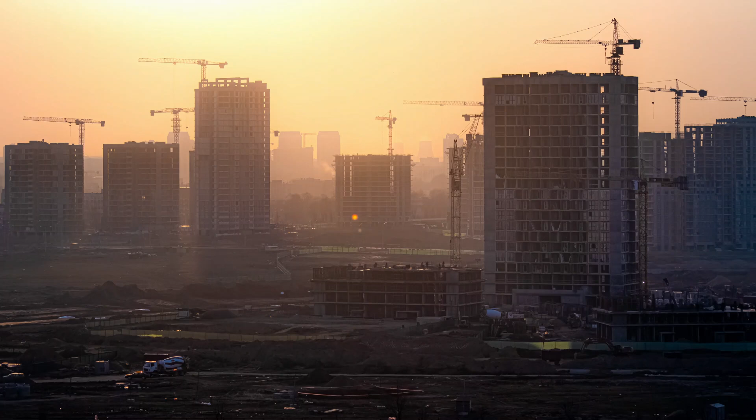Welcome to the future of construction. The revolutionary developments of 2025 are transforming the construction industry. We'll look at the newest construction technology in today's video, which you really need to be aware of. These developments, which range from sustainable solutions to artificial intelligence, are revolutionizing the sector.

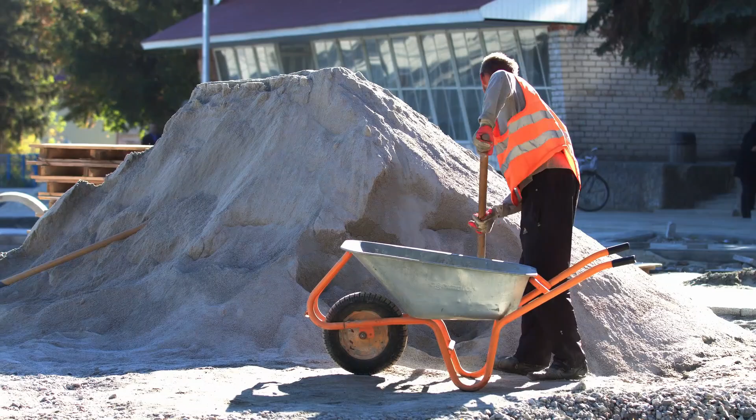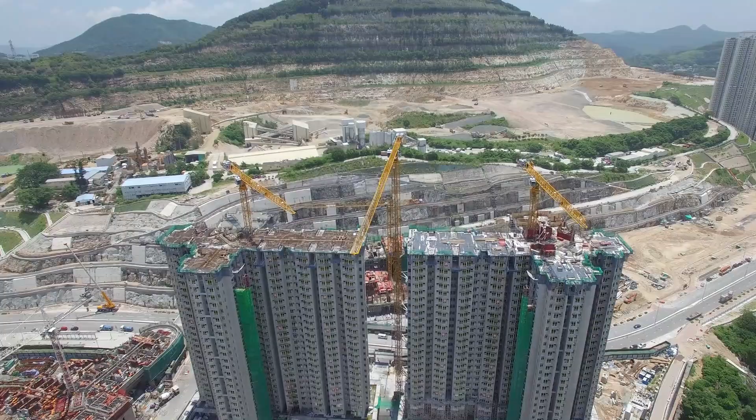Let's get started. 1. Autonomous construction vehicles. The way we transport materials around building sites is being completely transformed by our first technology. These days, autonomous construction vehicles are leading the way in the sector. Imagine self-driving bulldozers, cranes, and dump trucks. These vehicles are outfitted with AI and sensors that allow them to navigate and operate without human assistance.

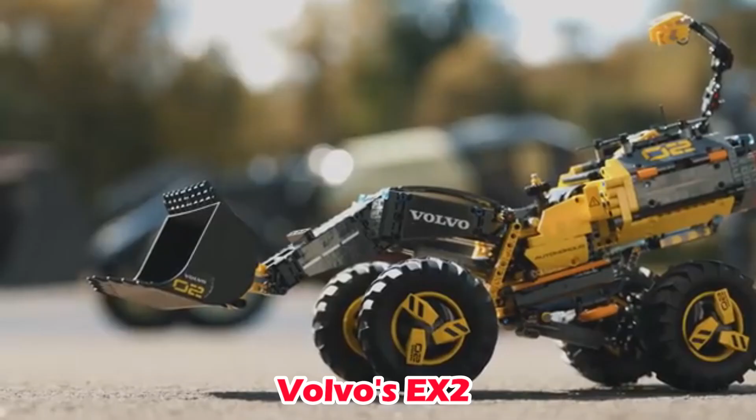These intelligent devices, which can operate effectively around the clock without human error or exhaustion, have already been produced by companies like Volvo and Caterpillar. Volvo's EX2 electric autonomous wheel loader can move large objects throughout the site without a driver, saving money and time.

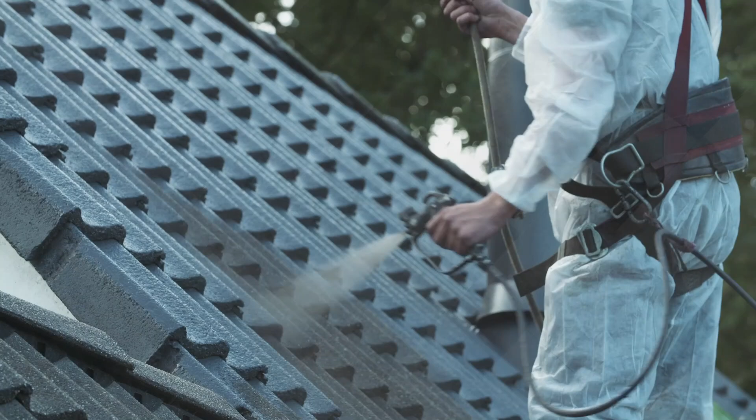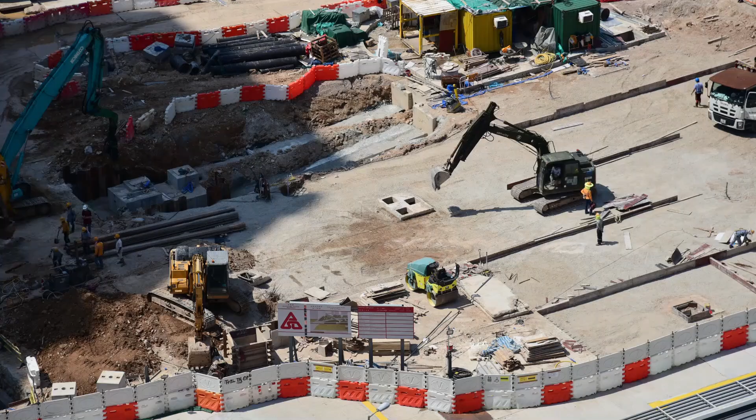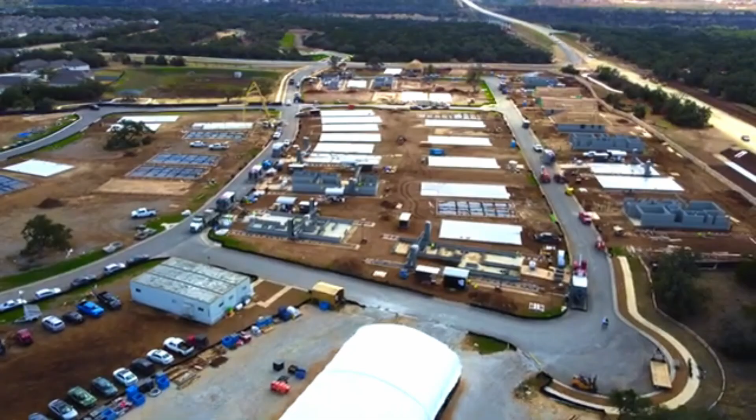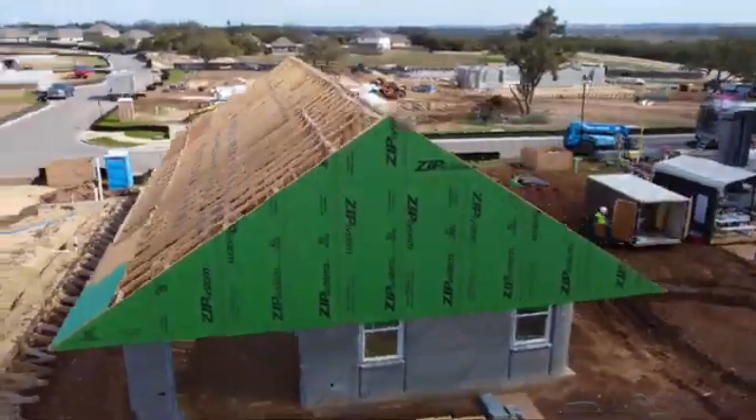2. 3D printing of buildings. Construction has been blown away by 3D printing technology. However, printing little models is not what we're talking about. We're printing whole structures in 2025. With large-scale printers that can produce entire skyscrapers, bridges, and even homes, 3D printing has entered the construction industry. Icon's Vulcan printer, which can print a 1,000 square foot house in a single day, is among the more impressive examples. It makes use of a unique, environmentally friendly, and incredibly durable concrete material. This technology promises to provide quick fixes for the housing shortfall, cut waste, and minimize building costs.

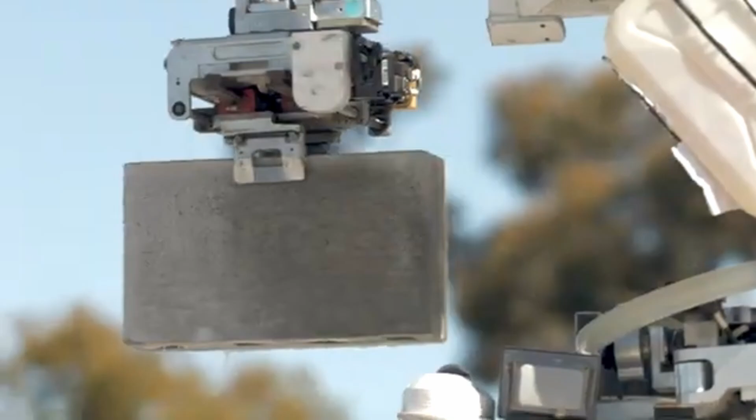3. Robotic construction workers. Speaking of robotics, a growing number of construction sites are using robotic labor. Robots such as FastBrick Robotics' Hadrian X can build bricks far more quickly and precisely than human laborers. By laying up to 1,000 bricks per hour, the Hadrian X reduces labor expenses and human error. Additionally, they are ideal for difficult construction projects like high-rise structures or disaster areas because they can operate in hazardous or difficult-to-reach areas.

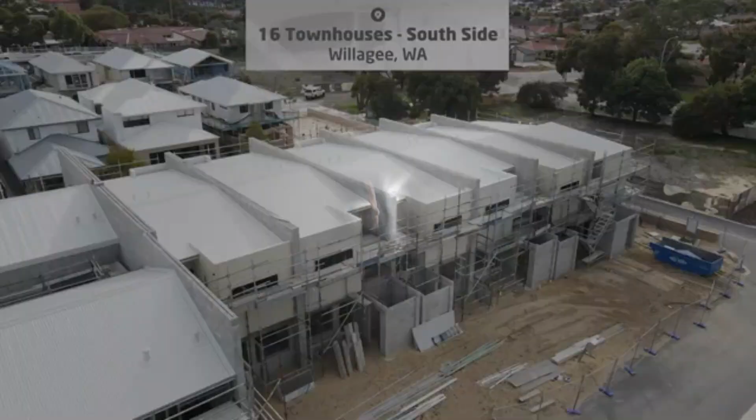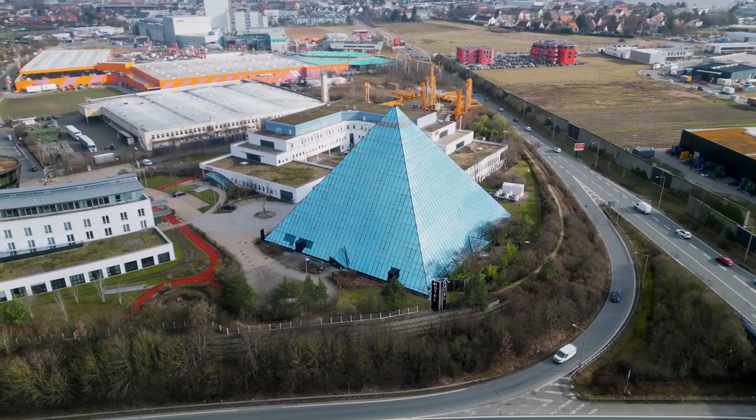4. Smart glass for buildings. Smart glasses will revolutionize both residential and business structures by 2025. This technology helps regulate light and heat by automatically adjusting window tints using electrochromic or photochromic materials. Consider windows that have the ability to brighten in the winter to let in more sunlight or darken in the summer to save money on cooling.

The dynamic glass made by View Incorporated is one such example. Their windows provide better comfort and energy efficiency by reacting to sunlight in real time. In addition to saving energy, this technique improves the building's aesthetic appeal by producing dynamic, eye-catching facades.

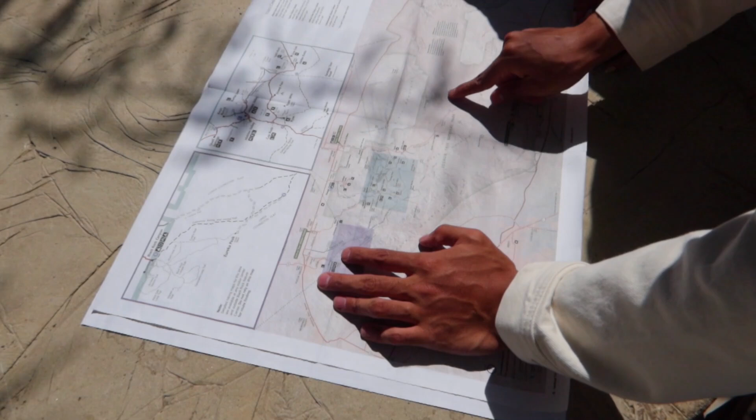5. Augmented reality in design and planning. It is revolutionizing the planning and design phases of building. By 2025, engineers, architects, and even construction workers will be able to view 3D models of structures on the job site using augmented reality glasses or smartphone apps.

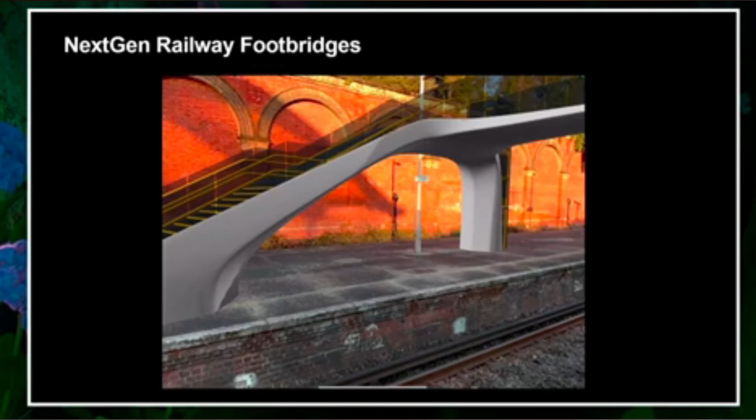Before a project is constructed, teams can use this technology to view how it will look in real time. To make sure everything is in its proper place, a construction manager can stroll around a site and look at an overlay of the building's layout. AR speeds up the building process, decreases errors, and enhances teamwork.

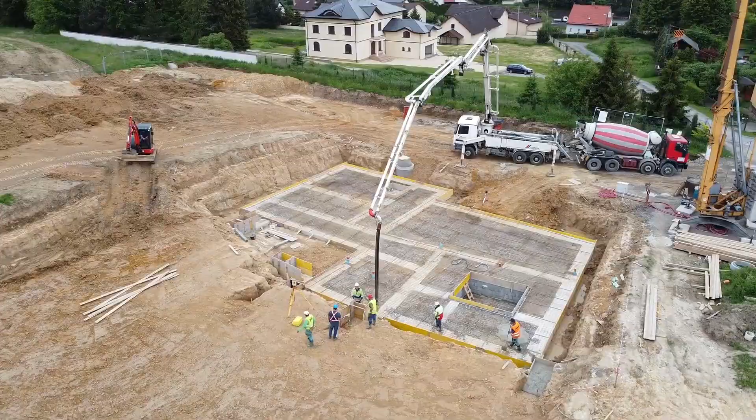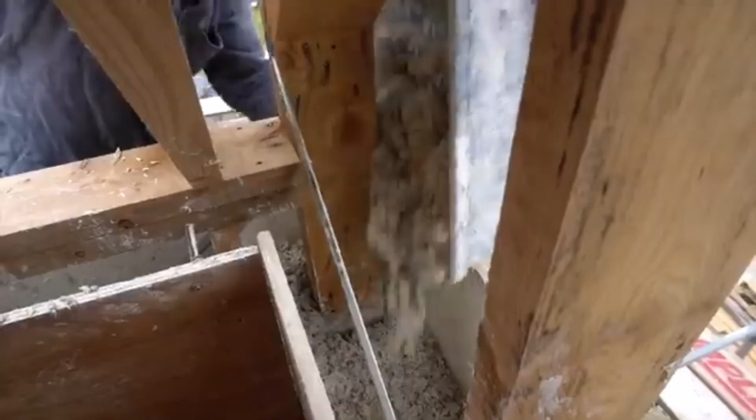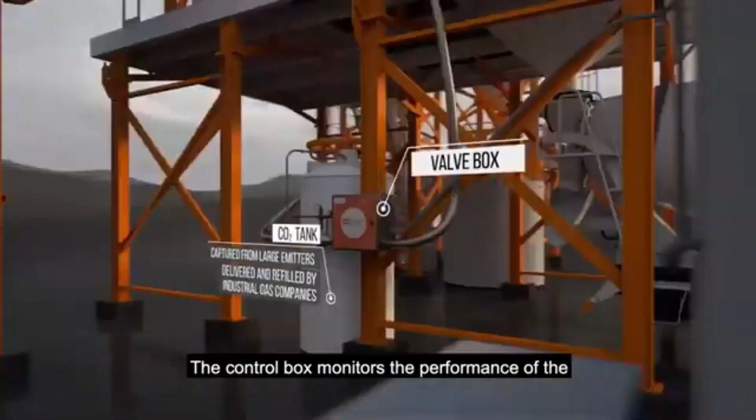6. Green and sustainable concrete alternatives. The building sector is moving towards sustainable solutions due to environmental concerns. Green and sustainable concrete substitutes are becoming a vital technology in 2025. The carbon footprint of traditional concrete has a significant negative influence on the environment. However, a cleaner substitute is being provided by innovative materials like hempcrete and carbon capture concrete, which greatly lowers the carbon emissions related to its manufacture by absorbing CO2 during the curing process. Leading this effort and assisting in the creation of a more environmentally friendly future are businesses such as CarbonCure.

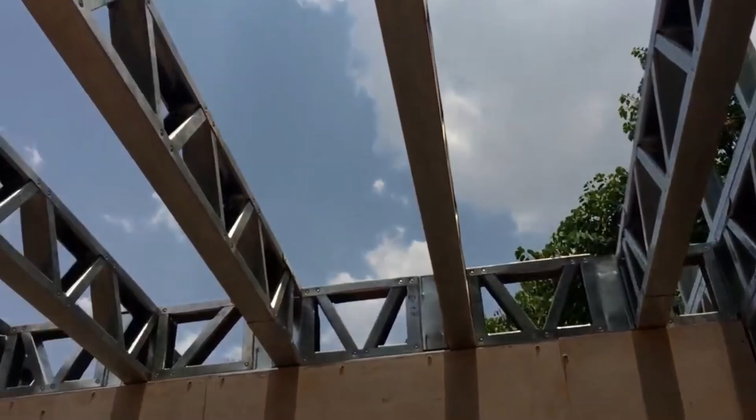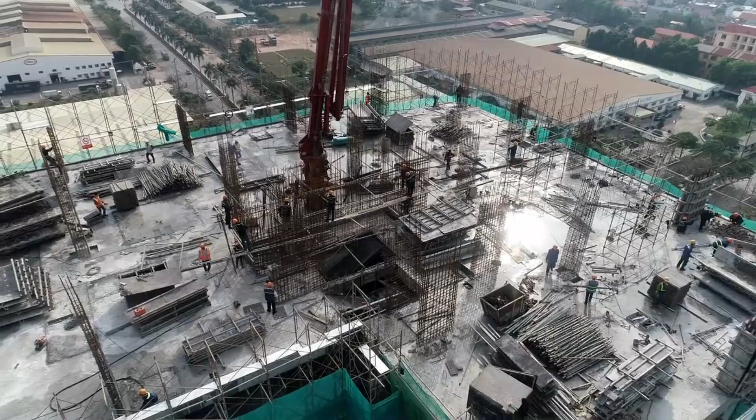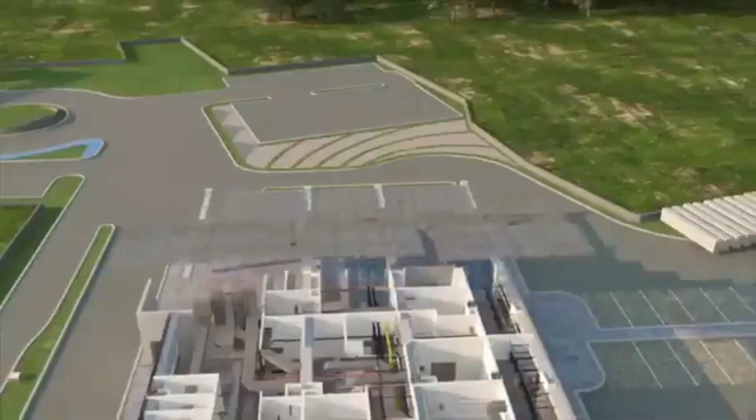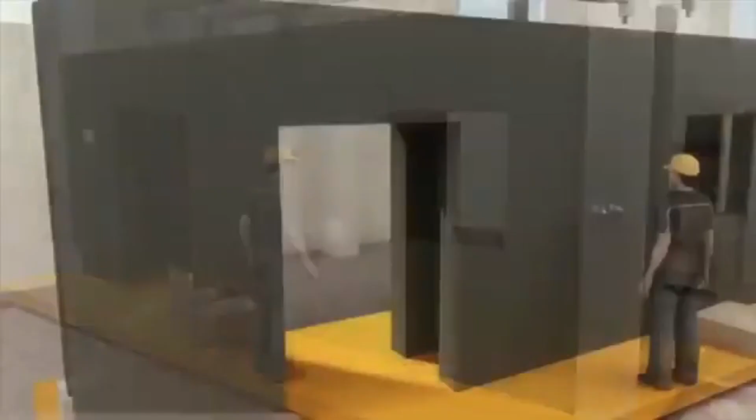7. Modular and prefabricated construction. It is the way of the future, not merely a trend. Construction can be completed more quickly, precisely, and with less disturbance if building components are constructed in a controlled environment off-site and then assembled on-site. This technology is more sophisticated than ever in 2025. Up to 50% less time is being spent on construction by using factories to produce entire hotel rooms, office buildings, and even apartments. For instance, Katerra is building modular homes at a never-before-seen pace by utilizing advanced robotics and artificial intelligence. This is a significant advancement for the sector, particularly in tackling the world's housing need.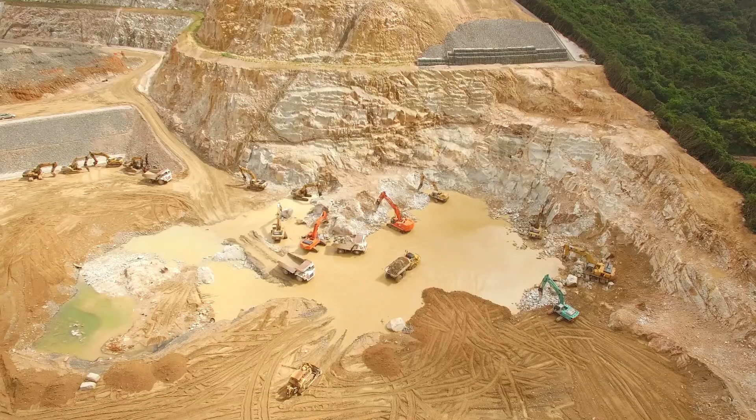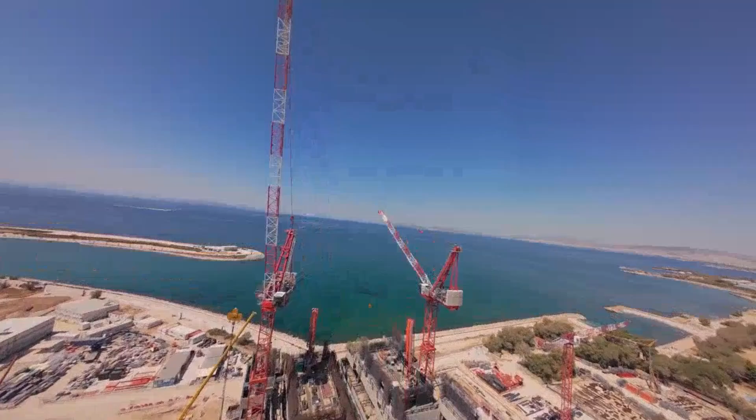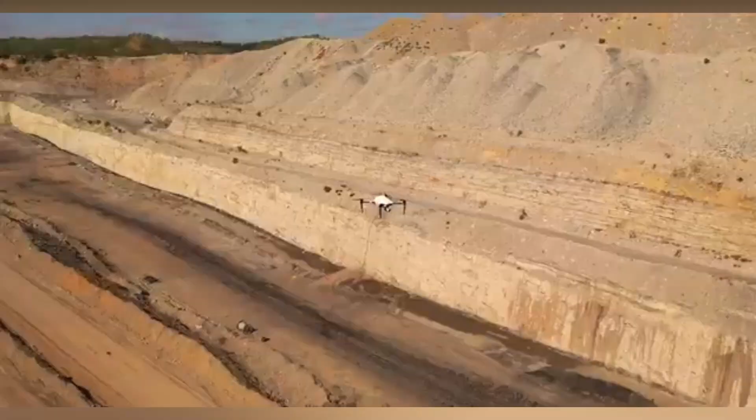8. Drones for site monitoring and inspections. Although drones are not new to the construction industry, their potential is being expanded in 2025. These days, drones can do more than recording aerial images due to their advanced sensors and artificial intelligence. They are able to conduct site inspections, track the status of construction in real time, and even evaluate the structural soundness of buildings. Drones are being used by businesses like Skycatch to produce detailed 3D maps and models of building sites, which enables project managers to make better decisions more quickly. These drones save time, increase safety, and lessen the need for scaffolding.

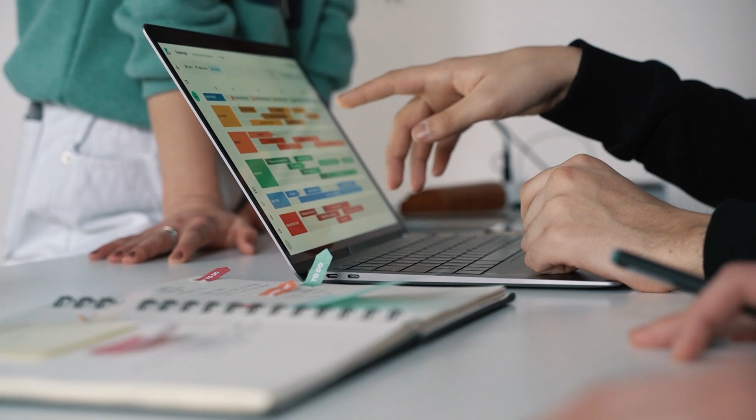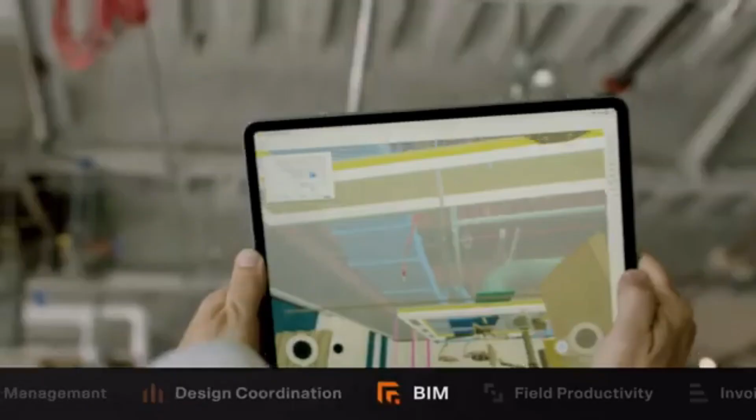9. AI-powered project management. The administration of construction projects is also being impacted by artificial intelligence. Large volumes of data from building sites may now be analyzed by AI-powered software to improve schedules, costs, and workflows. By 2025, artificial intelligence will be able to forecast any delays and give project managers real-time insights. AI is being used by programs like Procore and Buildertrend to help automate processes like manpower allocation and procurement. This results in fewer cost overruns, less human error, and quicker project completion.

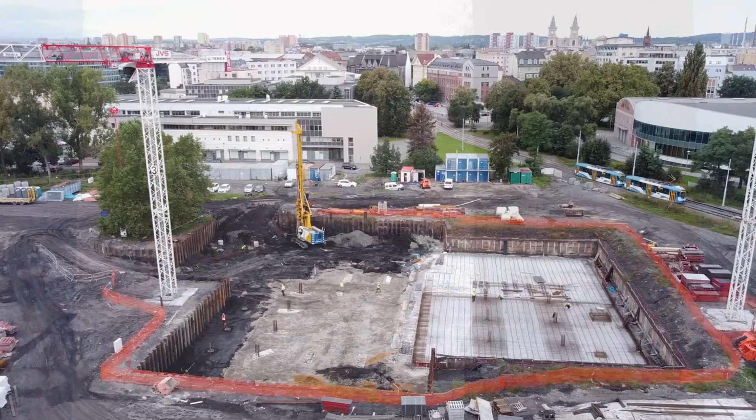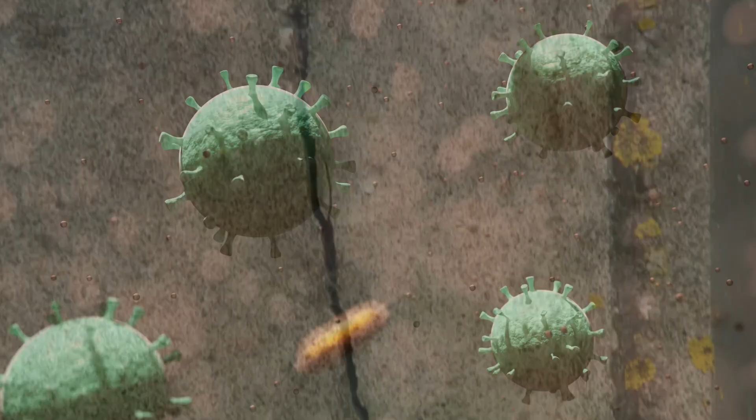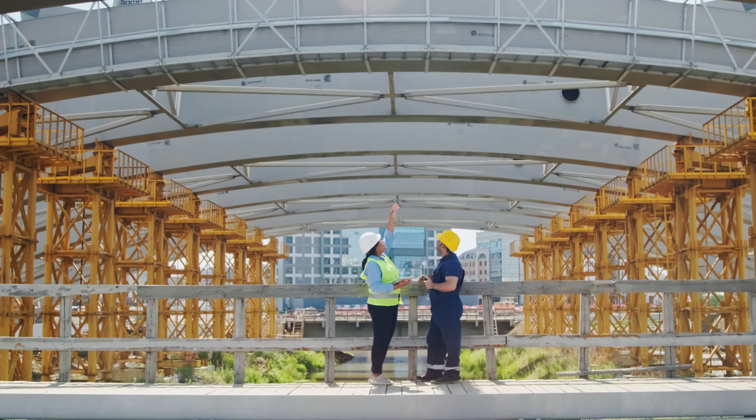Here are 10 innovative construction technologies you should be aware of by 2025. The industry is changing quickly, from eco-friendly materials to driverless machinery, and these developments are opening the door to a more intelligent and sustainable future. Thanks for watching, and see you in the next video.